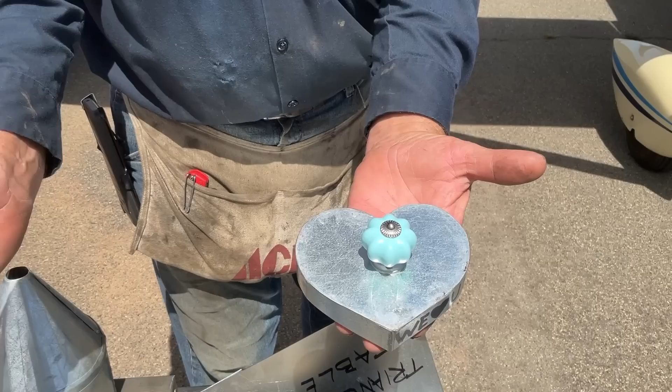Right there means we're ready to film another episode of Sheet Metal is Fun. Today, did you see the wink? No, you didn't see the wink.

So today we are going to add a base to the bottom of our tool tray with, look at this, imagine in my hand right now is a sliding drawer on the bottom of our tool tray. That's what we're going to do today. There's going to be a lot to it, but before we start that, I want to add a few more folks.

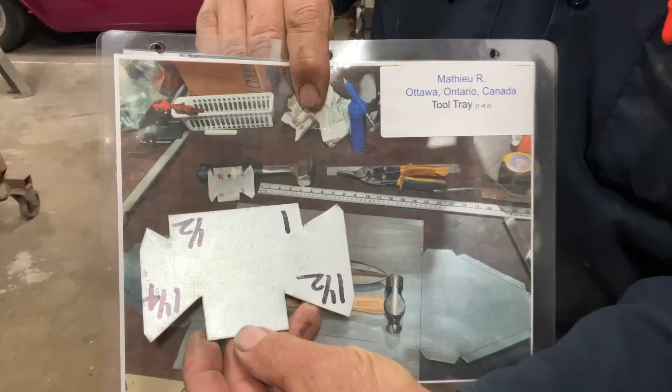Look at this. I see a little bit of resemblance there. Look at that scribe, you go Mathieu. Maybe this one, look at that. Love it, I love seeing you guys make stuff and move forward in your life and become more capable. So Mathieu showed us this is how he determined the size of his tool tray by what he wanted to put in it. And there it is. Look at this, can you zoom in on that? Is that glare good, hon?

I don't think anybody heard you nod your head, but she nodded her head.

Look at this beautiful tool tray with the tools in it that he wanted to have in it. Man, that's awesome, Mathieu. You're a rock star. You're going on our Fabulous Fabricators.

Along that same vein, making your project fit your needs. Look at Jason from Michigan City, Indiana. Look at this wide-bodied, heavy-duty tray. You put a cross brace in the bottom. I like that. That shows he's not afraid to think outside the box, or the tool tray in this case. He made it for his needs.

That's exactly what I want you to do. You may not need one that's 14 inches by 7. Maybe you need one like this. This one looks like it's almost a 1 foot square base, maybe 12 by 14. But this is what Jason needed, and this is what he made. Man, I love it. Thank you, Jason. I appreciate it. You made it your own, and you made it into the book of Fabulous Fabricators.

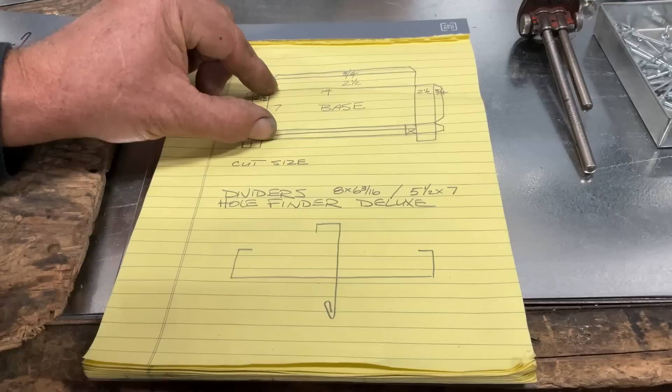The first thing we're going to do is make a base. So I've drawn it out, and I go over this every time, but if you draw it out first, give yourself a fighting chance. If this thing is 7 by 14, make sure that this one is about half of that, and help get the drawing into your mind. Give yourself a fighting chance. Take some of the guesswork out. So this is the base we're going to make. This is a drawing, this is what we would use as one of the industry standards on how to bend that up.

I'm going to make an X right here. X is always you, the fabricator. You always come up toward X. So that's an up and up. These are all ups. Matter of fact, everything in here is all up. So let's move that X over.

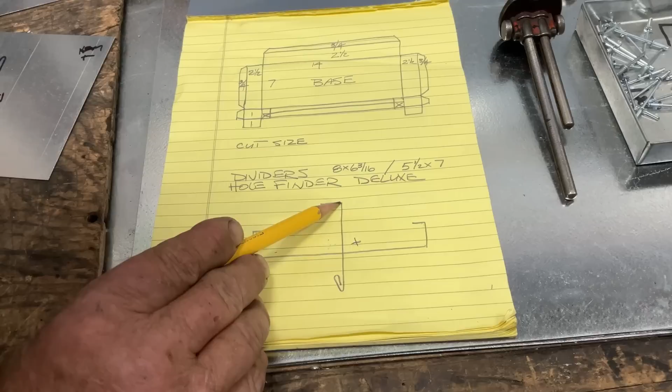Like I said, there's going to be a lot in this lesson. Look, the only thing I did was move that X over here. So now this is still an up because it's still up toward X. This is still up. But look, when I moved the X over here, this is going away from X. So now that's a down, and these are downs. That isn't going to work, but it also shows you how important it is to get the X in the right place.

So this is one way of marking. You can draw a diagram like this. This is for the base. I also have this, the drawer we're going to put in there. It's going to be 6 1/4 by 11 5/8. And here is that same drawing. Here's the X. So all these, X is always you, everything is up toward X, except look right here. There's a down. It's going away from X, away and away.

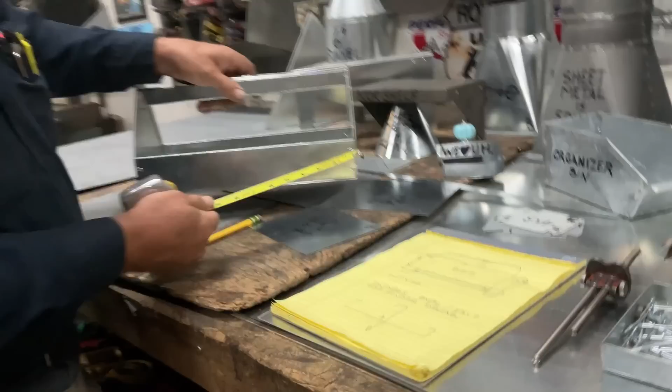So let's go right to the base. The first thing I want to do is determine the size of the base, because we're going to make our base the same size as our tool tray. Our tool tray is 14 by 7, but as you saw in our Fabulous Fabricators, make it what fits your needs and your application. But ours is 14 by 7, 14 by 7, and we're going to make the drawer come out this way.

If you wanted to, you could make it come out this way, but for us, we're going to come out this way. So let's look at this drawing.

To make this base, the first thing I did was draw this rectangle right here, and it is 14 by 7. Since I am the drawer and the fabricator, I didn't write the inch designation in here. We don't need it. We already know this is not 7 feet, we know that's not 14 feet.

So just for clarity, because some of these markings are kind of small, there's a 3/4, 2.5, 2.5 and 3/4. This is 2.5, this is also 2.5, so that whenever we fold them up, they all end up at the same place.

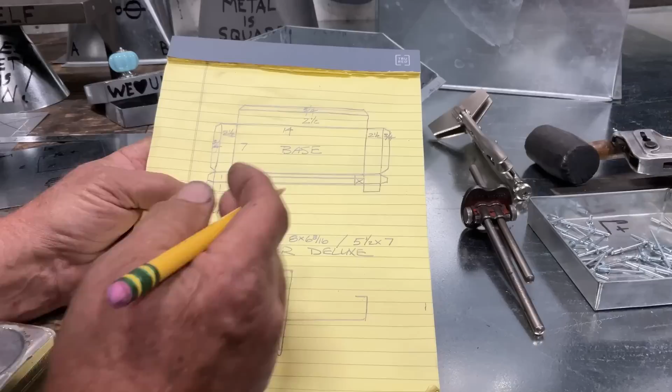One of the first things we're going to do when we start a project is draw out a pattern, and that allows us to look at it, to visualize it, to get it in our head what we're going to make. And then we come across a problematic corner or a corner that we have to think about. This X here just shows me that's a part that we're going to cut out.

So let's go to cut size, but before we make the cut size for our base, look at this. Cut size demo. So this is how I do it, and this is what works for me.

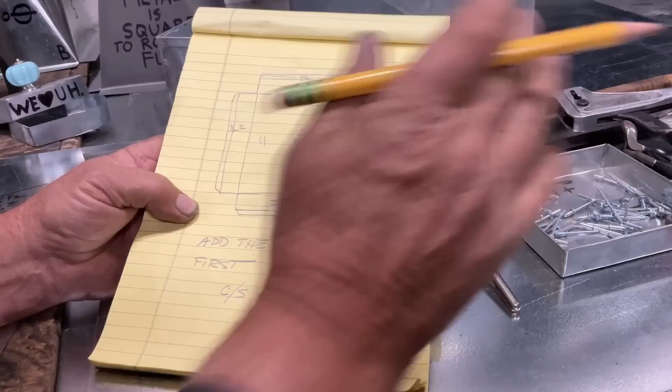The first thing I do, if I'm going to make this is a pan. It's 11 inches by 11 inches, 2 inches deep with a 1/2 inch hem.

So the first thing I'm going to do is add the allowances. So here's 2.5, 2.5, 2.5 and 2.5. I'm going to make myself a little note right here. And it's a pan, all the sides are equal, so I only have to do that once. So I'm going to add 5. Now I don't have to go 11 plus 2 plus 2 plus 1/2 plus 1/2. Instead I've gone 2.5 plus 2.5. That's my allowance. My allowance is 5 inches.

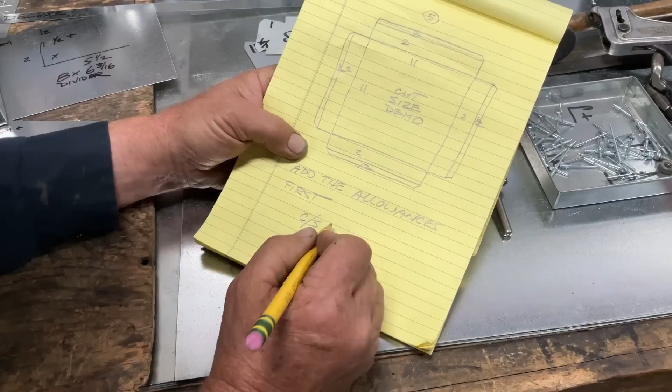Now all I've got to do is add this allowance onto the size of our pan. So 5 plus 11, here's our cut size, 16 inches. And if you want, it's 16 inches square. So I add the allowances first, and I'll put that number in a bubble on the size that it goes with. I didn't make one over here because they're all the same.

That's the first thing I'm going to do. So let's say we're back to our pan. We would figure out what size we wanted here, how deep we're going to make the pan, and I would go around and add the edges, add the allowances, and then add the inside dimension. So 2.5, 2.5, we know that's 5. There's our allowance designation. Now here's the size you want. Allowance designation plus the size gives us our cut size.

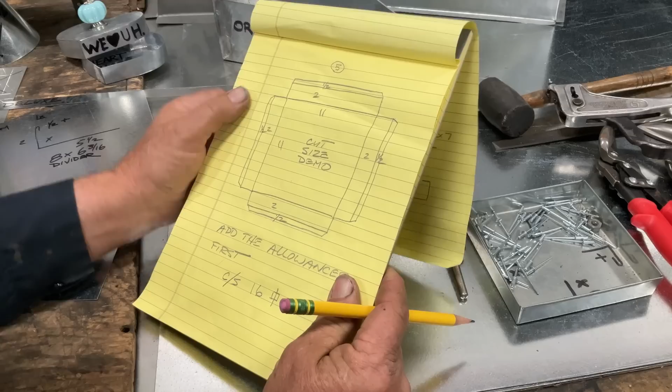Now, with that cut size demo, let's go ahead and apply that.

So here we have 2.5 and 3/4, that's 3 1/4. And then we have 2 more, that's 4 1/4, 5 1/4. So let's make that note, 5 1/4.

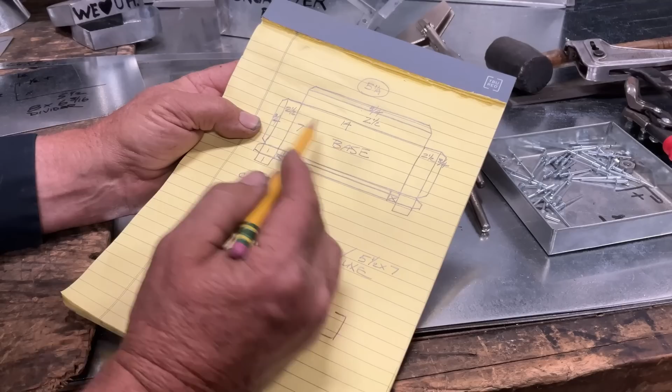Now we're going to add these allowances. This one I have to do twice because these allowances are different than these two. So 2.5 plus 2.5 is 5. 3/4 plus 3/4 is 1.5. 5 plus 1.5 is, ta-da, 6.5. So what I did: instead of 2.5 plus 2.5, that's so easy - we know that's 5, and we know that 3/4 and 3/4 is 1.5. 5 plus 1.5 gave us our 6.5 allowance.

We could have come over here. 2.5 plus 3/4 is 3 1/4. 2.5 and 3/4, 3 1/4, 3 1/4, 3 1/4, 6.5.

So now that we've added up our allowances, let's fill in the blanks. We are 5 1/4 plus our 7. Let me start this by saying, just out of habit, I always add the biggest number first whenever I'm thinking about it. So let's do the big number first: 14 plus 6.5.

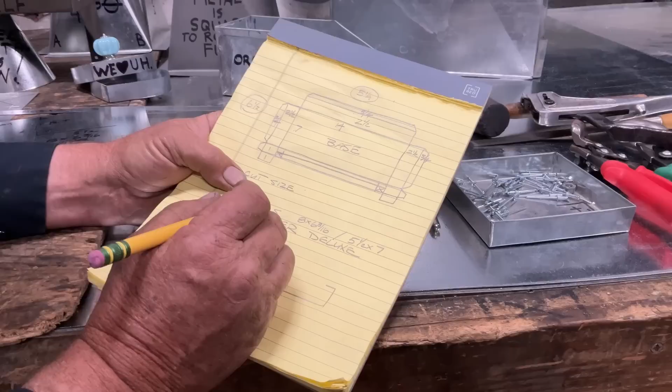I'll give you a second. Oh, that might be trademarked. I can't say that.

14 plus our 6.5 allowance, 20.5. 7 plus our 5 1/4 allowance, 12 1/4. Look at that. So our cut size is 20.5 by 12 1/4. So instead of starting at one end and taking 3/4 plus 2.5 plus 14 plus 2.5 plus 3/4, we added up our allowances, made a note of that, and then added that to the dimension that we want.

We're going to notice that same thing when we get back to the drawer.

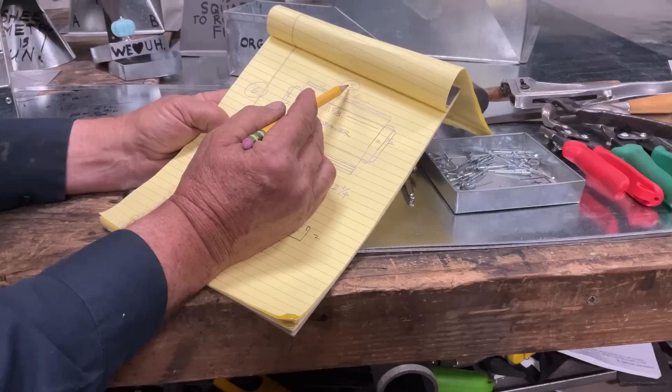Our drawer is 11 5/8 by 6 1/4. So you noticed up here, I've already added in the number that we need. So we're going to do, here it is right here: 16 5/8 by 12 1/4. So I took the allowance, made a note of it, and added that to the number we need, and that's going to be our drawer.

Here's that drawing again. The back side of the drawer is a 1/2 inch hem. The front, we're going to fold the handle right out of the sheet metal so we don't have to go and buy a separate handle. And then the sides, 1/2 inch hem, 1/2 inch hem.

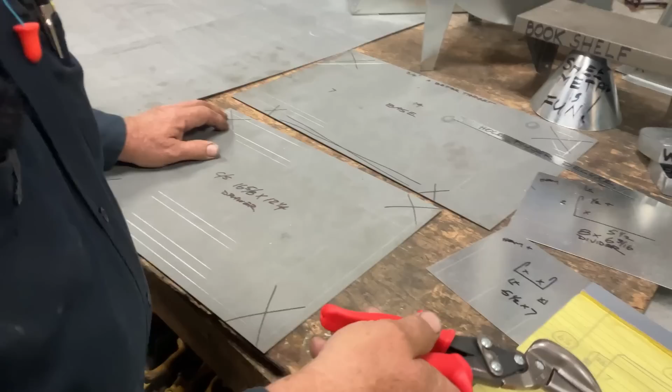All right, so now there's our cut size. Let's put, so now we have our base drawing, our base bending diagram, our cut size, and magic. So I'm using some bonderized metal. It has more of a matte finish, and I'm hoping that you can see those lines, and also there shouldn't be any glare off of this. So this is going to turn into that.

And so since you probably already have a pair of reds, if you bought a pair of reds and greens, we're just going to go ahead and cut it out with reds and greens.

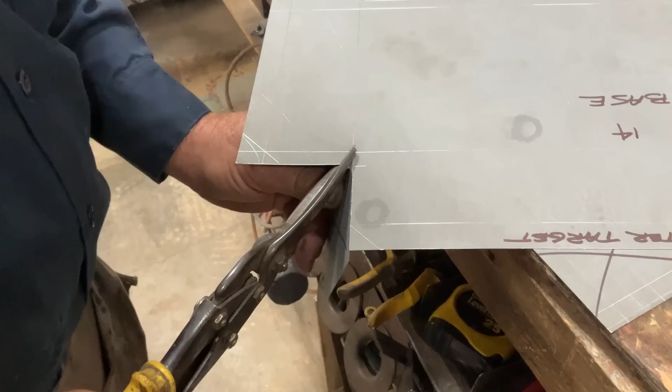Now, if you guys weren't looking, I would do this like this. But look, nobody's looking, right? And I left that little tail on there. But look at those long babies. But you are looking, so let's pretend that didn't happen. But if you weren't looking, that's how it would have happened.

All right, here we go. Let's continue the notching. Never go to the end of your snips unless you're notching, unless that's the last part of the cut.

This is going to be our 1/2 inch bending tab that we're going to rivet with. I always stop a little short, and that little piece stays on with this larger piece, and I don't have to look around on the floor for these.

All right, let's look back at our drawing to make sure I don't cut something off wrong. Let's go ahead and cut these 45s off here.

Notice the drop is being covered by the snip. So at the end of the cut, the drop is going to go down, as opposed to, that was right, here's wrong.

Now look, if you can see this part that's coming off, then it can get to you. But when you can't avoid it, put your finger on it. Get in the habit of positioning your material so that the drop always drops away from your eyes, your face, teeth if you have them, hair.

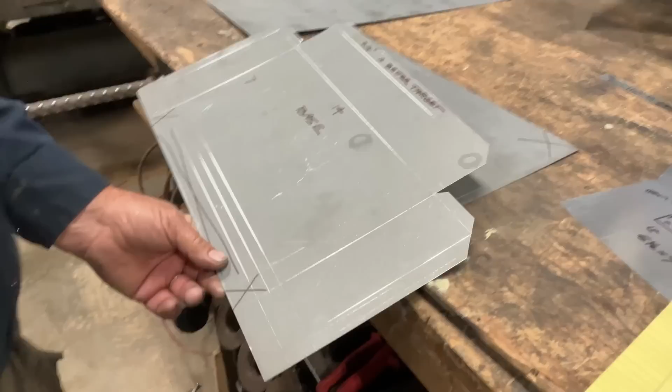Now we are going to notch this one all the way in. Let me think about it. Yep. Going to do that on this side too. This notch is a little out of the ordinary, but it also is what we want to do.

All right, so now look, I have this long X. I'm going to cut all of this out. You don't go to the end of your snip. So whenever we're snipping, once I cut, I always leave a little bit left. As I'm opening the snip, I'm pushing the snip. So you don't cut, open, and then push. As you're opening the snip, make that forward movement in the cut.

So let's see if we can see what that looks like in action. See how the snip, as I'm opening, I'm actually moving forward at the same time. Man, look at that. What a nice line. That's my first time, too.

All right, so we're going to fold that around. Let's take this out. Yep. Yep.

All right, let's see. That's going to go there. That's going to go there. And then we're going to make a 45-degree mark in here. Combination square. This thing has some really awkward notches in it.

And then this gets cut out. Wow, this just has a lot going on here. You guys are going to like this. I like it already. Let's draw our 45 in here.

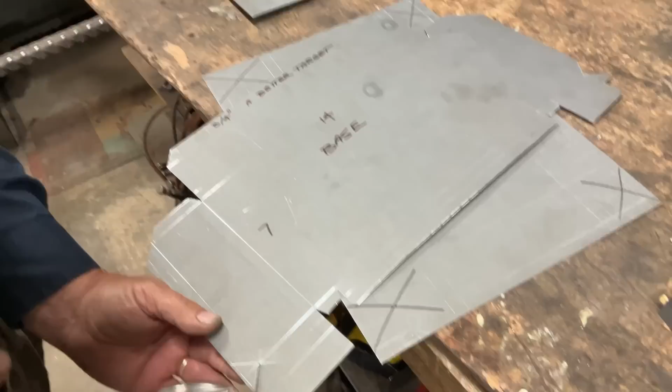Last notch. All right, let's see if that matches our drawing, and yes, it does.

So we can use a diagram, a bending diagram like that, or, for those of you that watch every episode, you've seen this already, so we can do a drawing like that, or we can mark each one individually.

What I'm drawing here tells me that when I get over to the brake, I'm going to bend a 90, and I'm going to bend that 90 up. That one's up toward X, up toward X. If I get in a hurry and I make a line like that,

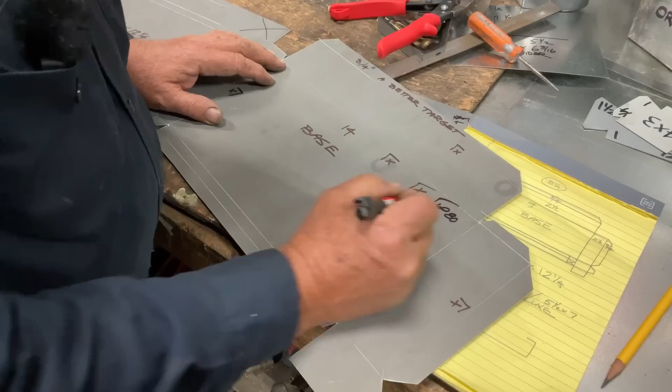that doesn't mean that I want you to use a protractor and try to copy that angle. If it's something other than a 90-degree bend, I will mark it. If it's not marked, it's a 90. But if I did have something like this, it might say up 80. But we don't have that. So if you see me make a mark very quickly, it's always a 90 unless there are certain circumstances.

Now this one in the front, this is going to be a little different. Look at this. This is going to do this. Now I've left this a little open just for clarity, but this is going to be a hem. And this is going to be an open hem. So we've got 90s. All right.

Should we go over to the brake and bend this one up, or you want to notch the second one? Want to bend it up? Let's bend it up. All right. So we've got this out of the ordinary little bend on the front. You're going to see why we did it when we get over there.

So let's go ahead and start this. I'm going to bend this first one. We're going to bend this hem. Now, part of me hates to do this because we're actually bending an unintentional bend where I don't really want it.

So, wait, don't go away. I'm still here. I'm not going anywhere. Still here. Did you hear me? All right.

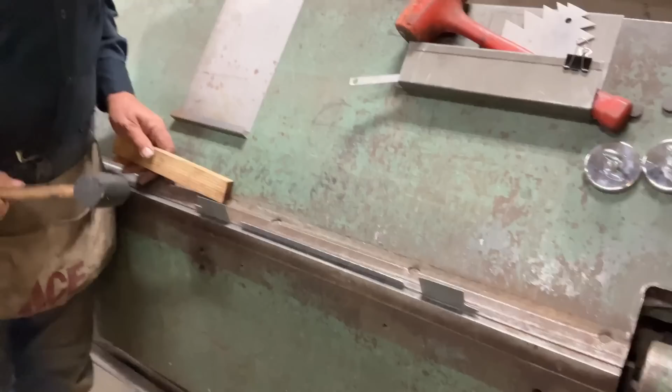Because we're going to bend a hem here, we had to bend these down that I didn't want to bend, but we had to bend them. And then let's see if we can finish this.

Don't let some old tin knocker catch you over by the brake with a hammer. They turn red, blue. Oh my gosh, it's gorgeous.

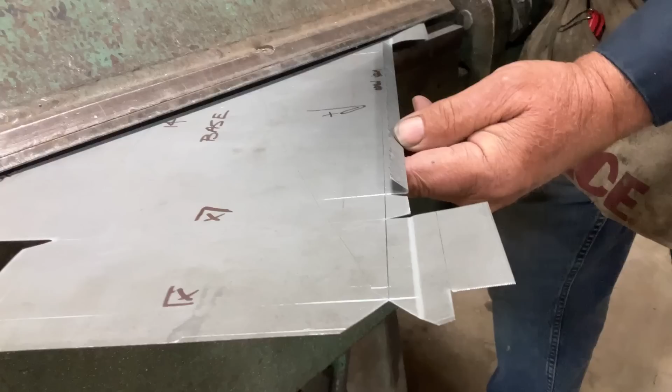All right, so the next thing we're going to do is, you see what we've done? We've bent the hem over. Now that we've got it started, we're going to flatten it out.

Beautiful, beautiful. Now these two bends that I put in there that I didn't really want to, let's see if we can just take a little bit of that out. And we're going to be the only ones that even notice. When we get it all the way done, nobody's going to see it. All right.

Now, we're going to go right here. This is our next bend. Because the first thing we did is we bent that hem. Now we're going to bend this one. It's going to be an open hem. It's actually 135 degrees, only because the front of the brake is 45 degrees, and 90 degrees plus 45 is 135.

So we're going to take this up here. Again, making that bend in the front that we didn't want, but it's also going to disappear. When we get this thing all done, nobody's going to see it. So let's finish this up.

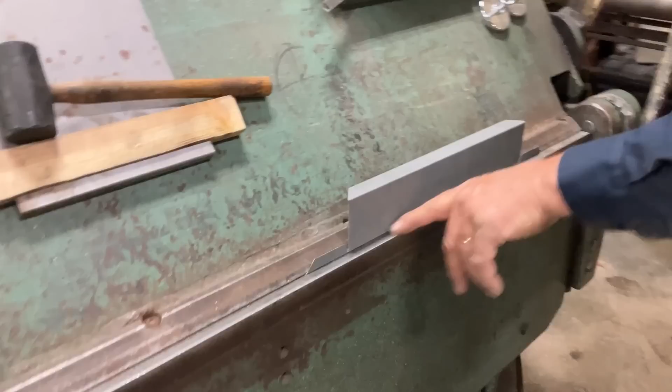Okay, so now let's come back here, turn up 3/4. When the bending leaf is flat like a table, that's 90 degrees. And then this one, another 90. Whenever we put the tabs on the long sides, which is what we have, when we're bending up this, we get these bent up for free. No extra charge. All right.

So some of this, I want to try to do as much of this right here in the brake that we can. I want that tab to go to the inside.

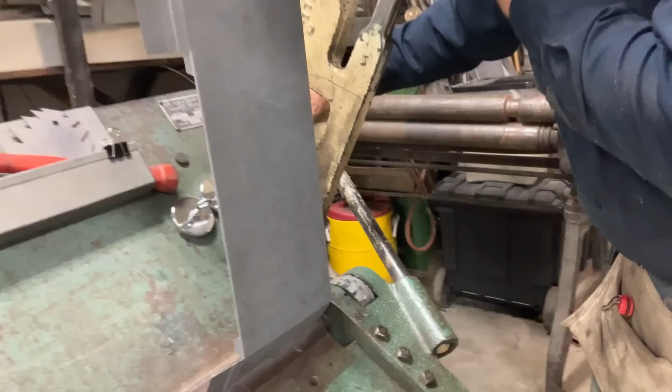This is one of the nice things about working with 26 gauge. If you watched our Material World episode, pun intended, you know that 26 gauge is on the thin side, but it's easy for home benders to bend.

Now we're going to go to the other side, the opposite side of the tool, the brake. We're going to bend this one up. We're doing the same thing here that we did on that side. But if we try to do this at that end, it would flatten out this tab right here that we've gone through all the trouble to make. So I want this to go to the outside of that tab. I'm watching it, and I'm also lifting.

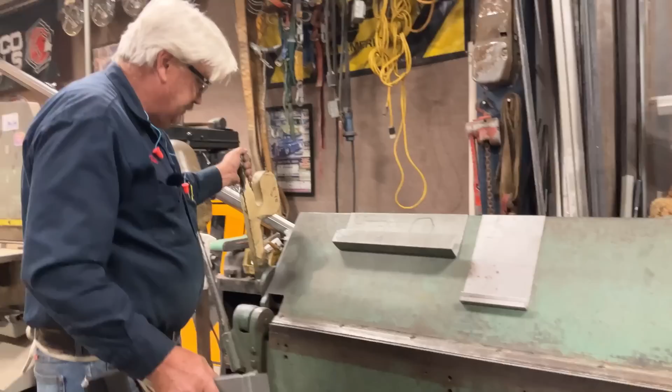All right, since we're getting super trick here, which is what we're doing, super trick, 90 degrees, flat like a table. Yeah, ooh, I like that. All right, let's take it back over to the bench. I'll see you at the bench.

All right, so this is sort of an odd little fold that we're making. Once we put a crease in here, the metal has memory built into it. So I'm just going to hold this right here, and we're going to finish up that bend by hand. Look at that. Oh boy, I sure like that.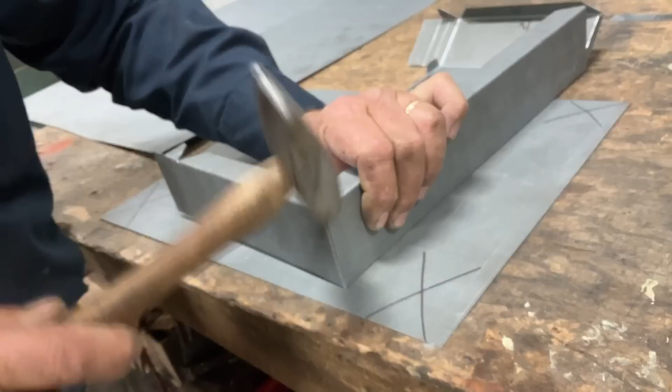Yeah, whenever we put a rivet in that, ooh.

All right, let's do the same thing here. Putting the crease in it first is what gives us the opportunity to bend this up by hand. You notice I'm pulling this one back so I can go inside, because to make that bend I have to go past 90. Can you see that angle? And then it'll spring back to where I really want it. And I want it right there. That's where I want it.

All right, since we've gone through all the time and effort to buy these vice grips, let's use them.

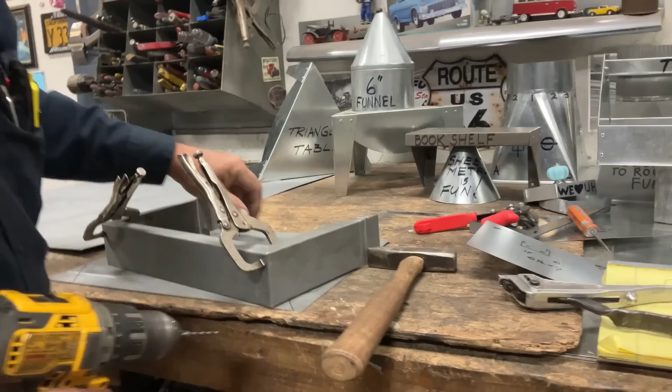So if you can see the tab that we bent in there, let's add a couple of pop rivets in there. Always watch where your hand is so that you don't find yourself in a bad spot. So let's put 2 in here. I'd rather push this way.

We always want to push as hard as you can reasonably push. With every rotation of the drill bit, you want to be removing material. Otherwise, you're just creating friction. A byproduct of friction is heat, and if you heat treat the metal, you just make it harder on yourself to finish the hole.

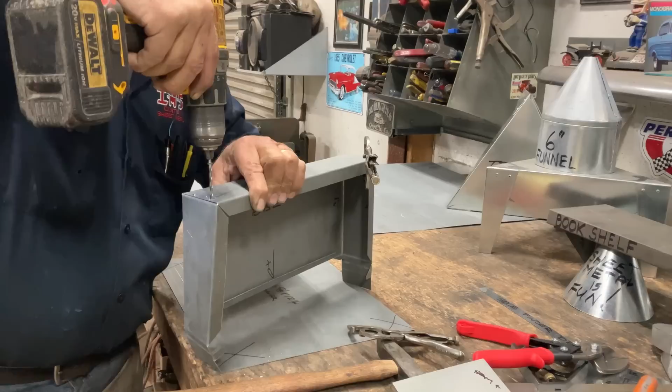And my battery just died. Yep. I'm in it to win it. I'm back. Shapow. In it to win it. Here we go.

I've had some folks ask about this pop riveter. This is made by United Shoe Machinery, and legend has it United Shoe Machinery is the folks who invented the pop rivet. They say it's the eyelet for shoes, that's why this is made by the shoe machinery company. I am willing to consider other legends about the origins of the pop rivet, but shoe machinery, the USM Corporation, look, it says pop because they were the ones that invented the pop rivet. But it's not a history class.

Here we go, one more hole. Oh, this thing's going to be awesome.

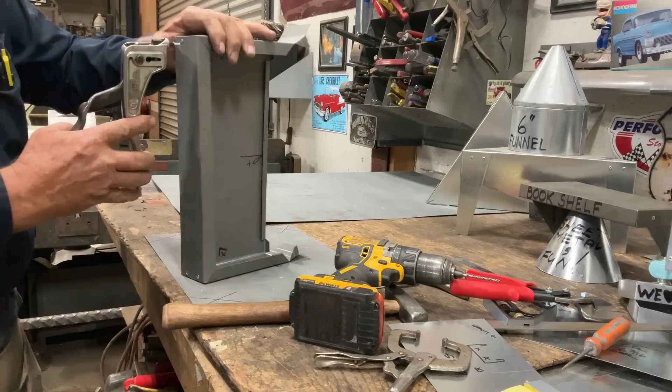Rivets come in different diameters and grip range. Here in America, they call this a number 43. It's an 1/8 inch diameter, and they say the grip range is 1/8 to 3/16, so that's how much you could grip. Look, here's a 44, see the difference? It's longer, same diameter, but more of a grip range. But we always want to use the shortest grip range that gets the job done. Look inside of our base, that's how much we want sticking through. We don't need a long rivet sticking through. I'm going to hold that still to make sure you got it.

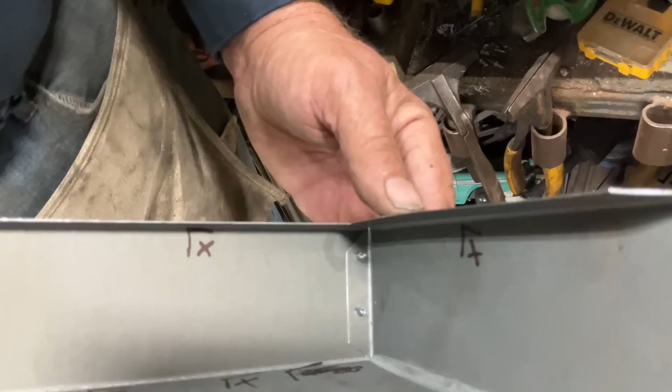Did you get it, baby?

All right, so there's different diameters and different grip ranges. What we're using is an 1/8 inch diameter, that's an 1/8 to 3/16. This is an 1/8 to 1/4, number 44.

All right, now let's get back to this funky little winner here. You ready? See where we did all this monkey motion here? So this part we folded over but left it raised in the back, and that's also a hemmed edge. But then we left this 90-degree tab right here. So here's what we're going to do.

We're going to take our hand seamers, which is regional. Hand seamers, tongs, duck bills.

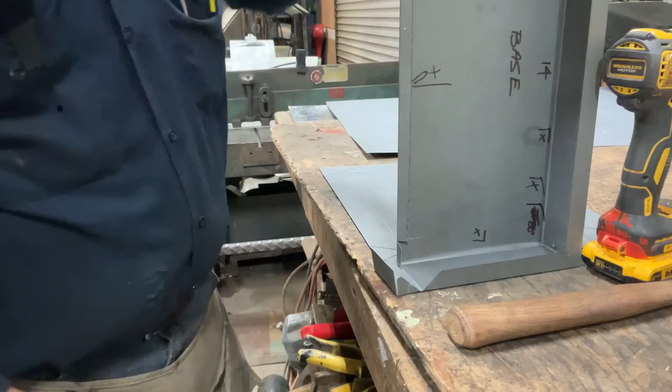They could be any number of things, I don't know. I've always gone with hand seamer. That always just seemed like the most professional. So I've just added that.

See where I've just added that 90. Now back here to this one bend that we made. I want you to watch. Are you ready?

Did you see what I just did right there? I bent it again on that line that we had. Here's the line we made when we bent this up. Look at that. Since we already had the line there and the metal has a memory...

Look at the way our corner has developed. So you know we have an upturned flange just behind here. Same thing over here. We have that upturned flange, and we're going to put a rivet into that.

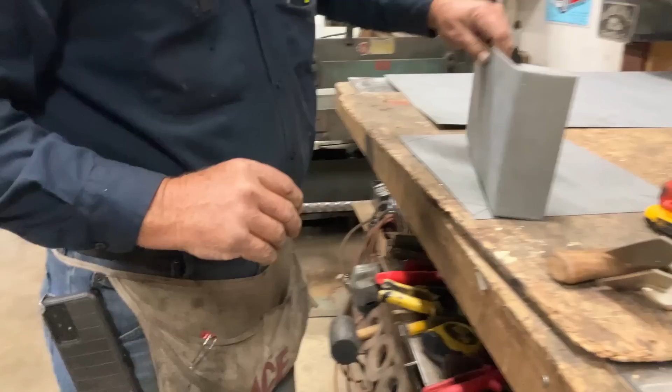Let's give that a little bit of hammer love. I don't know why I'm swinging this giant sledgehammer. Don't go anywhere, still here.

All right, I have cleverly hidden that one, but look at this one. So I've just folded that around. You know, we have a 90-degree flange turned right there, right?

So we're going to hold this right here, and we're going to put a rivet into that. We know that flange is a half inch. So if we come up from here a quarter inch, we're going to be right where we want to be.

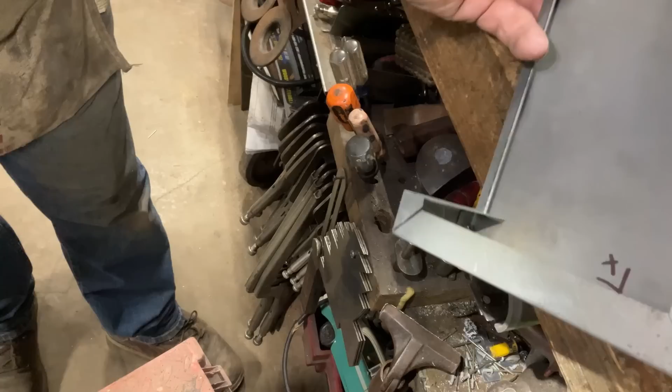If I hold that right there, hang on, let me get my flashlight. I'm just going to hold this still and you figure out, can you see it? So now we have a half inch turned into the base.

We cut all these at a 45 so that they would match up nicely. Let's get this one tapped around.

I think I'm going to drill this one from this position and see if I like that any better. So a quarter inch down on that line.

This is good. You got to see what happened, I pushed too hard and I bent that tab over. Can you see that? Right there. I got to straighten that back up. I need it to be vertical. Here we go.

I don't want you to look away and go, oh look, he looked away, and then it was done. Even though I think I did just bend it back with my thumb. So let's just put that back where we want it.

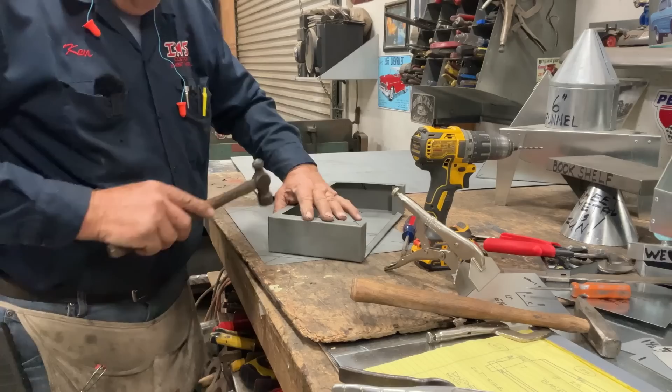Okay, so, oh, I guess we could have tried it on, huh? There we go. There's the new base to our tool tray.

Now, one of the things that I've done here is we went through the extra trouble to turn this flange because I think that just gives us a really nice finish. See what a nice finish that is? Where two flanges are turned in together. But if you wanted, we didn't have to turn this flange 90.

Imagine we could have just left that flange up. And then what we would do, imagine that flange is turned up.

Then our rivet would have gone through the base and into the side of the base of the tool tray. What I don't like about that is then from the inside the tool tray, you have the back side of the rivets infringing on your useful space.

So we did it for a couple of things. I think that's a really good looking, I like the way this all comes together. And then we don't have to see the back side of the rivet.

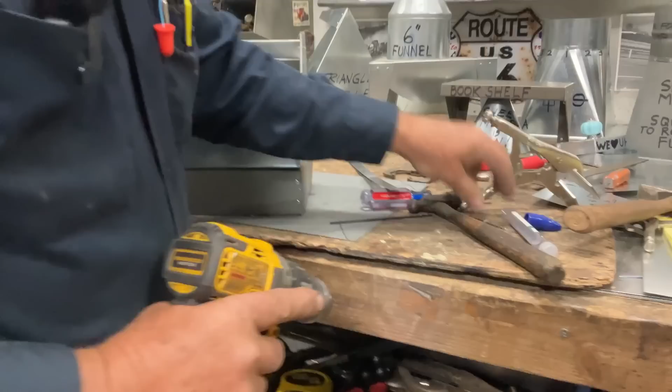So, because of the way that we turn the flange, it makes this difficult to drill this hole. Even though it looks like I could do it across this side, to move across this side to get those rivets in would be difficult. So just in case, we bought...

A big drill, long drill bit. So let's line this corner up. Make sure we like it. We like it. And then let's put a pop rivet in here.

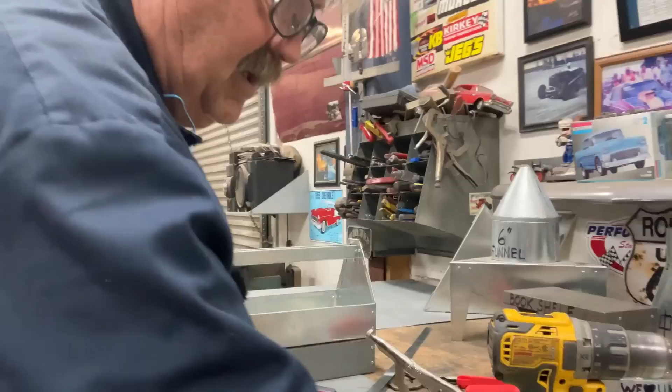Hon, have I told you today how much I love a good sharp drill bit? I love a good sharp drill bit. Did you see how that thing went through there? Like...

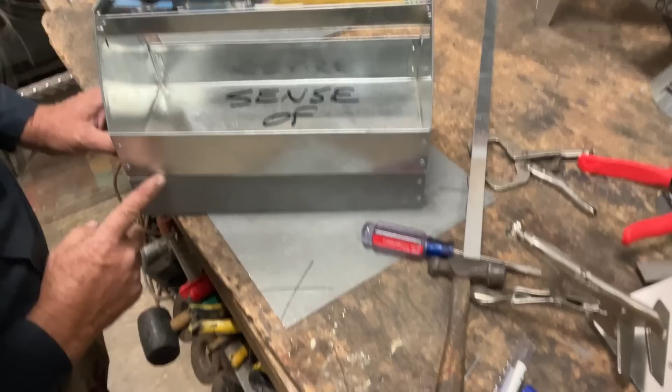I like it. Anytime you're putting several fasteners in a long run, once we put one in here, the next fastener wants to be as far away from that one as we can. Because if we get short-sighted, we could put the next rivet in right here. Look, that's pretty close, but then look what that does to the rest. So what we're going to do is come down here and put the next rivet as far away as we can.

Ooh, I love that sharp drill bit, man. That thing is nice. I don't know if you can hear the excitement in my voice, but boy.

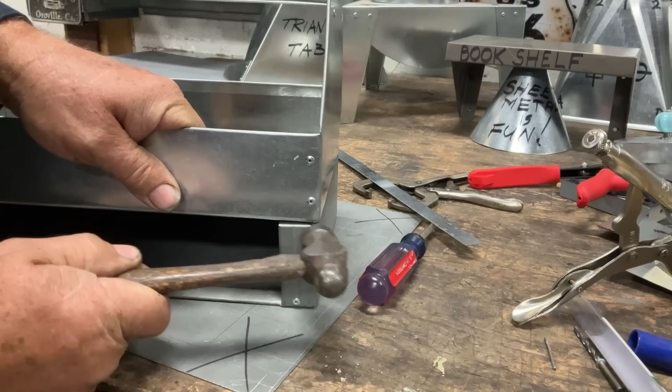Now what I'm going to do, look right here, open this up, get one last visual picture on what's underneath. Let's get one more. Let's get one in this side. And we'll take some of the wiggle out.

If you think about it, after you use your pop riveter, load it again, and then when you're ready to use it again, it's ready to rock.

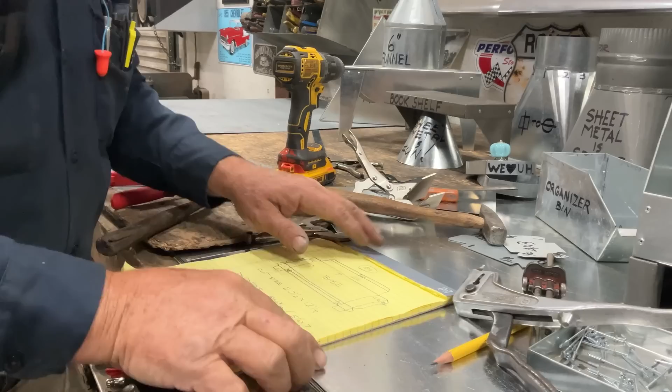Now let's move on to the drawer. Let's go to the drawing of our drawer in case there's any wisdom to be found there. I like it. So now we have a picture of what we're making. We have a diagram of what we're making.

We're going to use our reds. We got the base made and installed. I added a couple more rivets around here. Looks like I got about 7 of them in there all together. That gives us a real nice finish all the way around.

Now let's make the drawer that's going to go into that place we've created. Take one last look at our drawing. That's going to give us the best idea on how to make what we're making. All right, I'm ready, I feel good.

So let's go here all the way to the corner. Now we're going to take this half, stop before the corner, bend it up out of the way, make this last notch, and then that piece has a good home somewhere that doesn't include us.

Same thing here. We're going to cut all the way into the end of the notch and leave a little tail on there.

I like it. Now in the front, let's look at our drawing. We're going to make this straight cut in right here, and we're going to leave that tab. Straight cut in. There's our tab. Leave a little something in there.

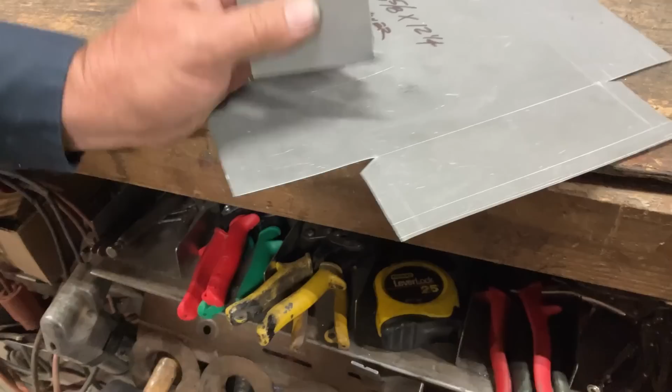The only time you go to the end of your snips is when you're notching. Doing the same thing here.

All right, now let's look at our drawing. Okay, so what we're doing is we're just cutting these in at a little bit of an angle. Cut there, there.

So this is a classic example of when a shop person, which I fit that description, would use yellows instead of reds, even though yellows and reds cut the same. Yellows are what we use in the shop for notching.

Notice the position of my hand. So we're going to go there with my right hand. This gets my right hand in a place of more comfort, as opposed to this. You see, I had to elevate my elbow and my arm to make this cut. But with a straight pair of snips, I can make that cut down here on a different plane.

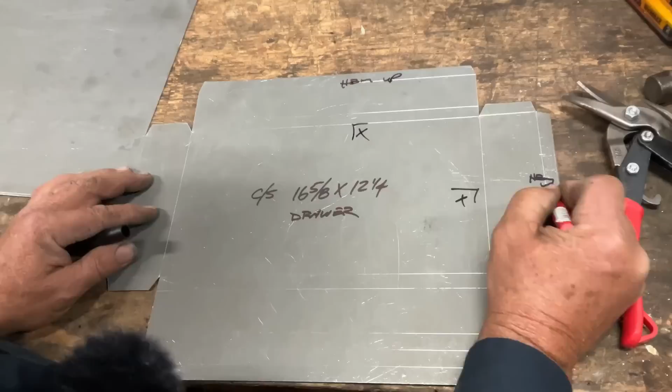All right, let's get our marker out. Right now we're looking at the drawing. We've made the cut list, we blanked out the piece, and we looked at the diagram. Let's go ahead and mark this. Hem up, 90 up, 90 up, hem up. You know the deal.

Now this is the only one that gets tricky, because what we're going to do here is hem down, and then down and down. All I wrote here was down. It's a 90 down, but we're going to assume it's going to be a 90 unless otherwise noted. If I wanted something besides 90, I would let you know. So we could have done it this way.

Oh, look at that. Okay, everybody. Oh, you know what's the best eraser? Ink. It's a down.

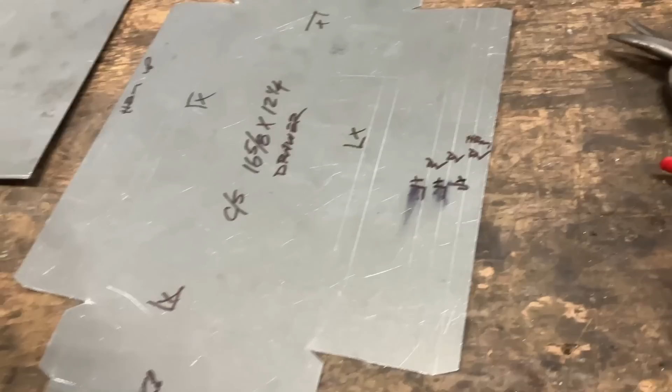Down, hem down. So since those are all hems down, let's reach over here and move these marks. Since they're going to be down, we're going to go 1, 2, 3. We just want to make enough of a mark to transfer the bend mark to the other side. So all I did was put a prick mark. This is a prick punch. You notice it has a blunt end on it.

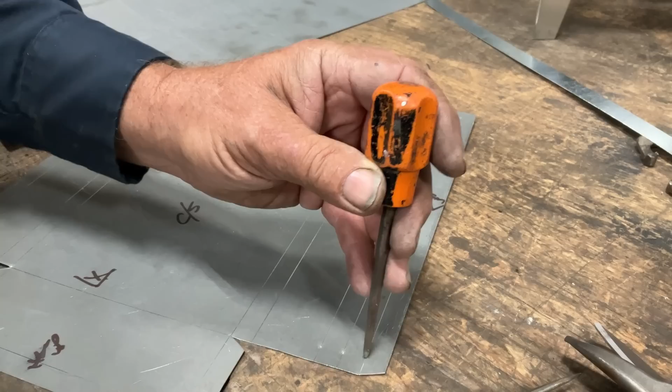This is a scribe, notice the difference. This is for marking, you would never hit this one. It drives old guys crazy. I've seen them do it. I mean, seen it. This is a prick punch, so notice the more blunt edge. This one is for hitting, this one we can hit. This one, look, I can't even get myself to do it. Nope, can't do it.

All right, let's go bend this up. So here we are with the brake. We have our diagrams. The number one thing you always do to your project is perform the bend that causes the least amount of change in the material. So we don't want to bend a 90, we want to bend these hems.

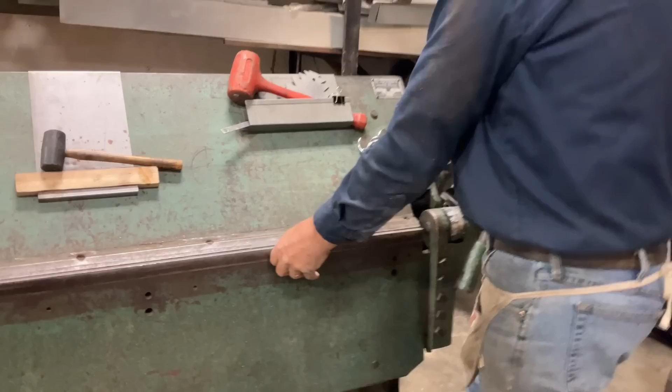Let's go ahead, this is one of the reasons a half inch hem is very common in the trade, because the front of the brake is a half inch. So sometimes we don't even mark it, we already know where the half inch is when it's flush in the front. Now let's give that a little smash. Same thing here, half inch hem, also flush in the front.

I like the way you move, baby. You've seen this, you've seen this play before. All right, don't go anywhere, don't go anywhere. No smoke and mirrors here. You see me on the struggle bus, by golly, we're going to take a ride together.

All right, half inch hem up. Look what I'm going to do this time, flatten the hem out front so I don't have to fish around for it. Now our next hem is a down hem. Right on that prick mark. Yeah, this is looking good. Let's flatten that out.

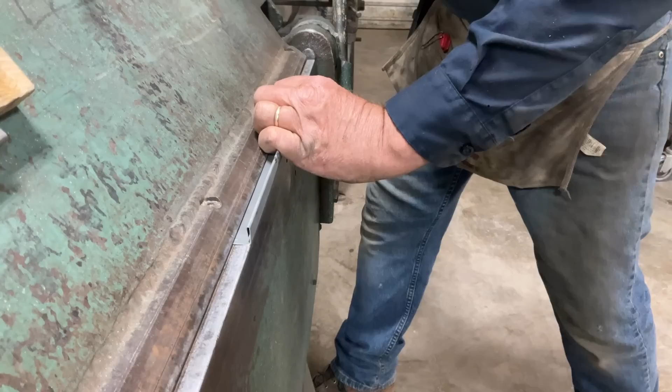Now let's go to the next mark on our prick marks. We also made it a half, so it's flush in the front. This one's a 90. I see a system developing here, I see a pattern. Flush in the front, half inch, 90. I sure like that.

Back over here. You guys holler if I'm going too fast. All right, I don't hear anybody. I'm bending the long sides up first because the long side is the one that has my tab on it.

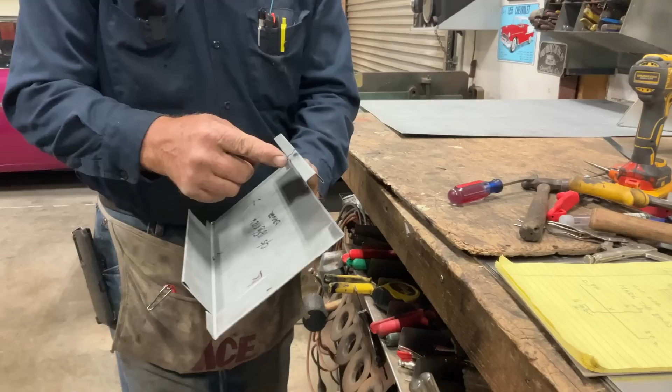All right, let's go back over to the bench. All right, we're back at the bench. So we just finished bending up the long bends and the hem, the down, the up hems. So all we got to do now is fold up the ends. But we want these tabs to go to the inside of our tray. So the first thing we're going to do is lightly push down, mostly twisting.

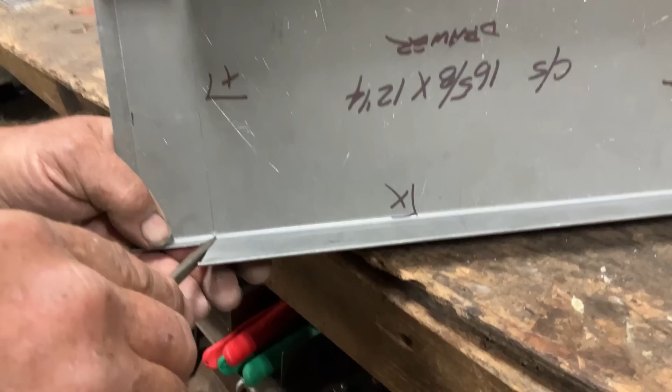Now, this is how I want you to do it. So there's always something behind the screwdriver, right? I want everybody out there in land to show me what's wrong with this picture right here. Ooh, there's a lot wrong with that picture. Always have something backing. So I'm not making this effort by pushing, I'm making this effort by turning. And by turning, I'm letting the tab know that I want it to go to the inside of that upturned flange. Just turning.

I don't want you to get in a place where you're doing this. That's what we would like to accomplish. We want to open that hem because we want that tab to go inside the hem. But I don't want you to do this. Don't perform the function with brute force. I'd rather have you have a small screwdriver, no brute force, light taps, and then a slight turn. Look what a nice open hem. Did you see what we have there?

And we weren't pushing a sharp instrument toward the parts of us, let whatever's on the inside of us let it out. So here we are again. I'm just going to take this with no pushing, no force, just taps. Now that I'm tapped, I'm going to rotate. See how I've opened that up? Isn't that awesome? All right, let's go over here to the box and pan brake.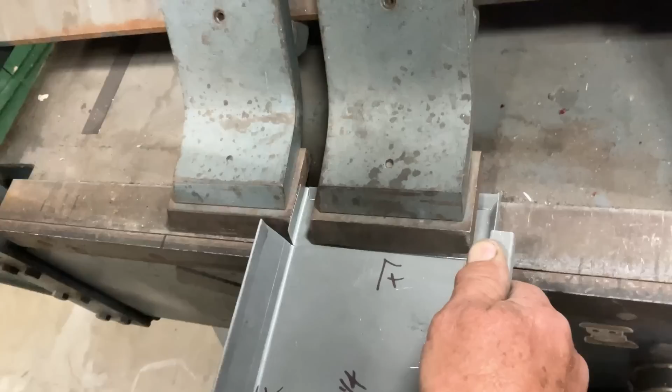Here we go. Coming up nice and slow. Making sure the end goes inside. I like it. Now I'm going to take it inside of there because I want to go past 90. And then whenever we come back, we'll tuck it inside. And then we'll go back to the bench and we'll fine tune it.

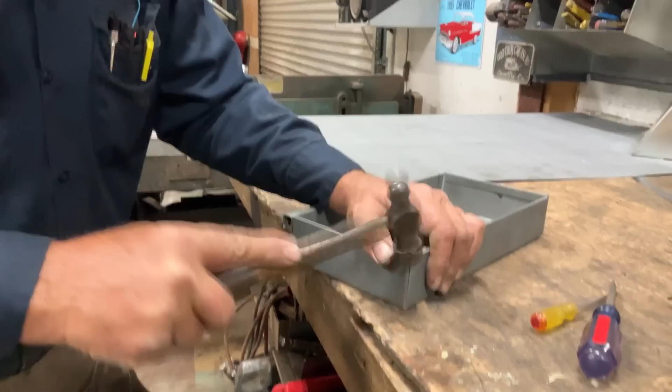Here we are, back at the bench. When I said fine tuning, this is what I was talking about. I'm putting the tab into the hem. I'm going to hold still just for a second to make sure the camera's getting that. Tab is going into that open hem. So you can see this end is a little high, so I'm going to tap downwardly and then just watch it go to where I want it to go.

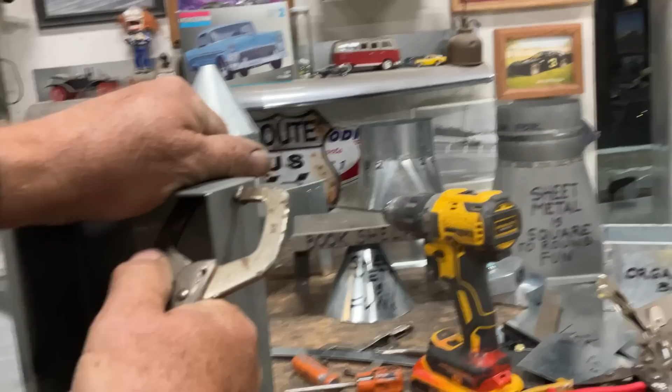So we're going to hold that down. I'm going to clamp that. Here we go. Nice sharp bit. Same thing here. One more little love tap. I love it.

Forgot to load my pop gun. Told you to load your pop gun. And I didn't load the pop gun. What's this though? Old dog, new tricks. All right.

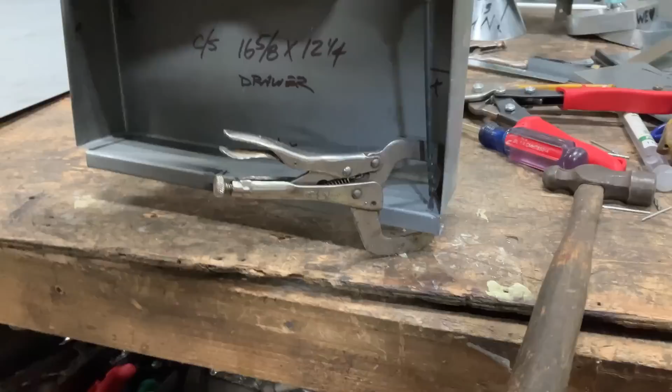I know what you're thinking. Well, look at this, putting it in from this side.

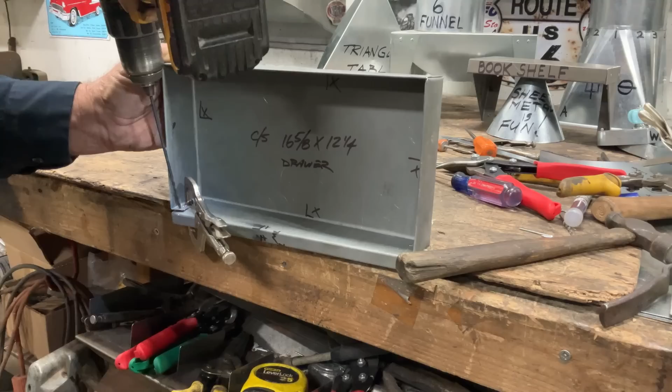All right, we're just going to put a little bit of love on it here. A little love here.

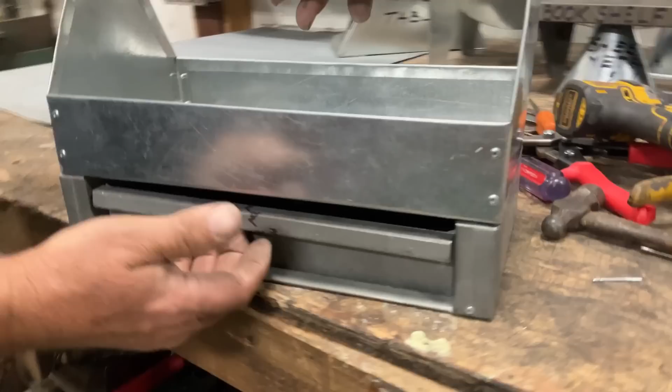We're flush in the front, so we didn't have a handle that's sticking out. That's why we made our tray a 1/2 inch shallower. And so now to get our tray out, we just have to lift and slide it out.

So these 1 inch bends that we made back into the base, they are what is registering the tray to the left and the right. If we didn't have that 1 inch right here, then the tray could get lost behind this mullion. That's like million, but with a U, M-U-L-L-I-O-N. So if we didn't have that, the tray could go behind there. So this way we didn't have to go shopping for a handle.

We had it. We're coming up on the last part of it, so I also wanted to show you a couple of things. I want to put a couple of dividers in here. So let's go over to the brake real quick.

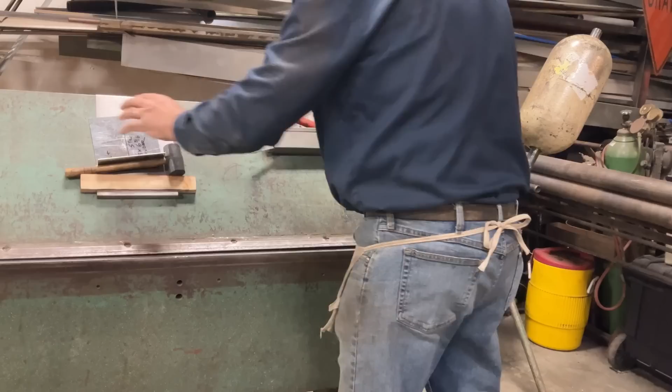There's that 1/2 inch hem. Now to this one. The tape, when the leaf is flat, that's a 90. We're going to put 2 hems on this one.

Man, this thing is coming out so good. Now I'm going to push it in. I'm going to make this next bend. Coming up 90. Last one.

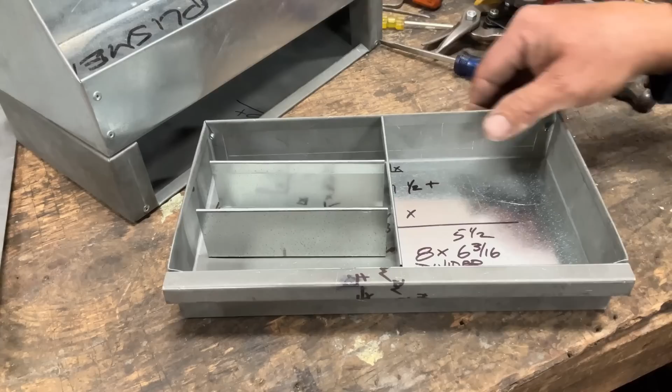All right, here we go. So now we have our tray, our drawer. Now what I've done is I've made a very simple divider. And then we've made another divider. All I did was bend up a channel.

So if you wanted this to be your configuration, what you would do is take this one, put a little dab of polyurethane on the back, or any adhesive of your choice. Silicone would probably work here. Then you would put that in. That would hold the divider in place if you just wanted to split your tray into 2.

But let's say you want to split it into 3. You would do the same thing. Add some sealant to the bottom of this, put that in there. So now we have... I should have put a little more bend in this. Let me do that. Look at that.

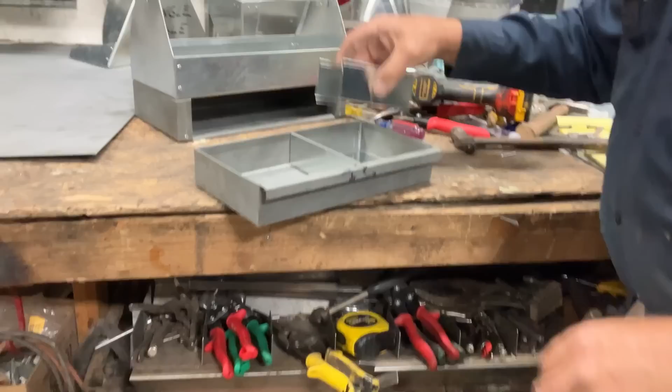So let's look at this, what I did with the divider. Again, your tool tray is probably going to be different than mine, but I went with 5.5, which was half of this drawer width, and then I made a 2-inch flange up, which matches the one in the tool tray.

What I did with the hem is instead of turning a 1/2-inch hem, I turned a 9/16 hem. The reason I do that is I want the divider to stay just below the top of the drawer. Can you see that little drop right there? We just don't want, I want you to see this meeting, this intersection. Let me come over here on this side, because what I don't want to do is I don't want this to do that.

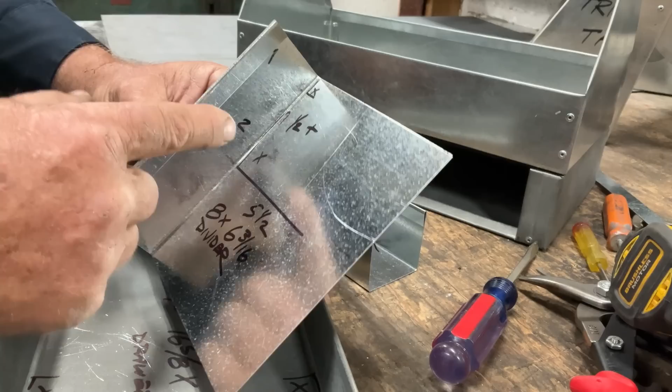So what I did was I told myself I would make a 2-inch tall flange with a 1/2-inch 90, but look at this little plus. So when I turned that 1/2-inch 90, the 1/2-inch hem, I turned more than a half. So that shortened this to make sure I didn't end up with this, to make sure we stayed just below the top. Same thing here.

So now I have 3 drawers, and if I wanted, I could make a really narrow one and a wide one. I could make this any size I wanted. This was just a channel that had been bent up. See the hems on there?

All right. So now we've made a base. It's got this little ramp here that's going to feed our tray in. Our tray can't come out until we lift it up and bring it out.

The 1-inch return. This is that weird notch we talked about, what a weird little notch that was. And we talked also about that line, that little crease, that little bend that you and I are going to be the only ones that notice.

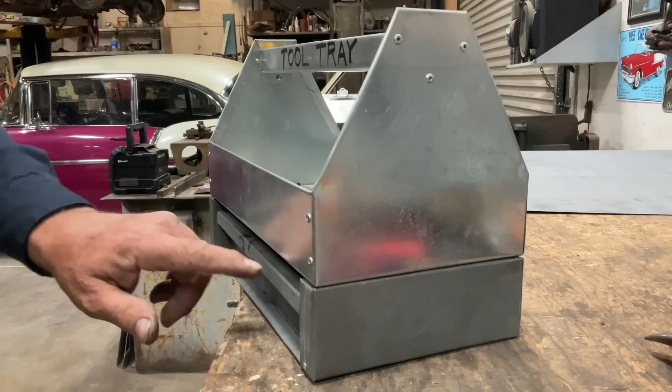This is all flush in the front, so there's nothing sticking out whenever you walk past. I could have made this tray a little taller; this gap is a little bit wide. It's a little wide, but also there's no trouble getting it in and out. There's something to be said for it, if you try to get this very close, every time you go to pull your tray out, it's going to take a little bit of additional effort.

All right, I think that's it, hon. Don't you think we've done it?

So we took our tool tray, we added a base, we turned a flange to the inside so we could rivet from the top, and that gives us a nice clean attachment that gives us a good finish. And we have a nice drawer with some dividers in it, or without any dividers.

I like it. You like it? Man, she likes it. All right, that is it.

So we made a drawer on the bottom of our tool tray. Man, I like it, I like it. And we didn't have to go to a hardware store to buy a handle or any hinges or any latches. This ramp made our latch.